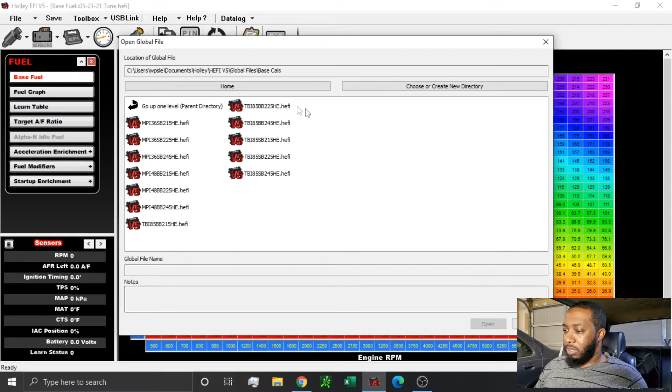Now, I did not build this base map. Holley provides some base fuel maps in the software already, which is actually pretty cool. As you can see here, open global file. If you go into here, they got base files. So this came with, and this is Holley V5, by the way, some base files, and you see for multi-port fuel injection, TBI. So you got some things in here that kind of get you going.

All right, so this is the base fuel map that it builds, and this kind of builds off of what you put in here, your target air fuel ratio. So you can go in there. This comes set up too, but I would change this. You know, do some research on the internet, because I didn't know anything about tuning or any of this stuff until I got it. So I'm kind of learning as I go. But get your air fuels where you want it.

Up here, it's going to be kind of like wide open throttle, and here it's going to be kind of like idling. And say you're wide open throttle and you just let off the throttle, you're up here around 5,500, 6,000. It's gonna come out here. You're gonna see a lot of vacuum here. It's gonna pull here and see what I gotta do, and just adding fuel. And we give a little crackle, a little pops, whatever, and it'll come back up as it comes back to idle right up around here. So what you put in here is how it's gonna adjust this, as far as the automatic learning thing is concerned. So that's your base fuel.

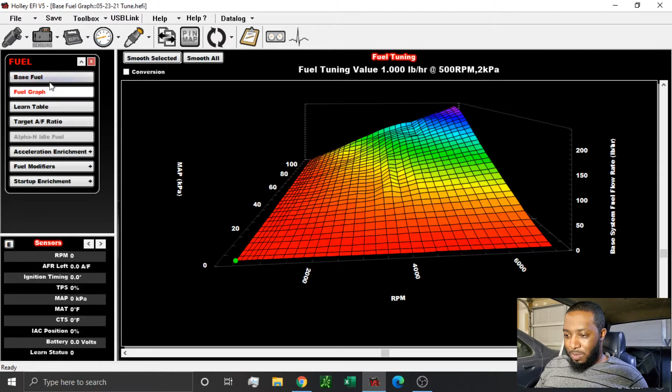And then you can go to learn fuel. Well, this is the base fuel graph, and now you're gonna go to learn fuel. So this is currently what is learned. And I just plugged this up to the laptop, so I'm seeing this just like you guys are seeing this right now. And this is showing you percent that is adding or subtracting to or from this base table, based on what you got in here, the target.

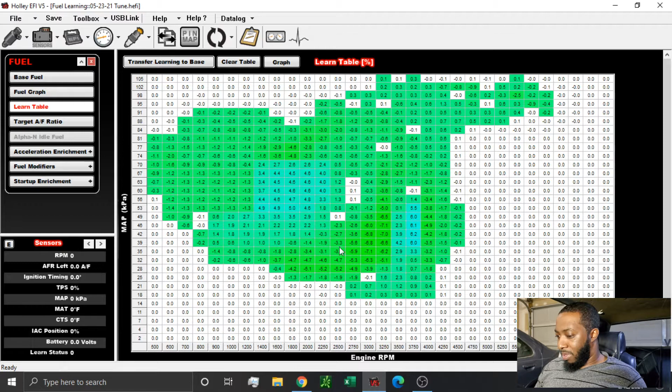Right, so you go back to your learn table, and you can see it's adding a chunk of fuel right here in this area. It's not too bad. It's only adding 4 more percent to what's here. And we're taking fuel out down here. And not seeing no big radical changes, that's good. And mind you, I had this on here for a while, so it basically learned a lot. So I got the learn turned down. So now I get into that next.

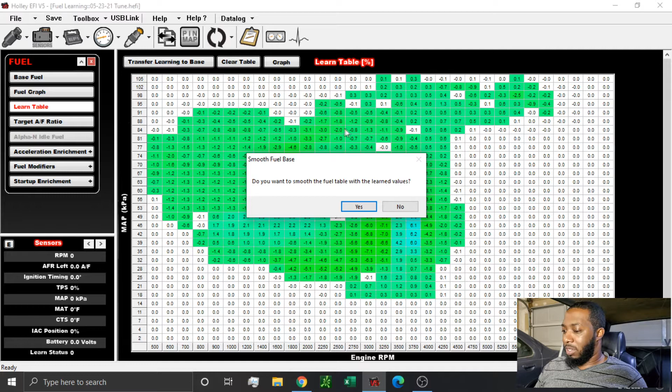So what you do here, for it to keep getting better and better, you want to transfer what is learned so far. And I do this every time I hook up the laptop to the car after a couple drives or whatever. I just hit transfer learn to base. And what you don't want to do, it says, do you want to smooth the fuel table with the learned values? No, you don't want to do that, because if you do that, it's going to change this part plus everything around it. What you want to change on this base table is only the cells that changed here. So you hit no. And see, now this is reset to 0 because it's ready to learn again.

So you go back to your base fuel table, and you see it only changes where these dots are. It didn't smooth anything around here, so nothing that it changed here affected anything that it didn't learn. So you do that. Yeah, let me save this while I'm here. Let's save this down. I like to save mine by the dates I did this on. So we'll put this like so.

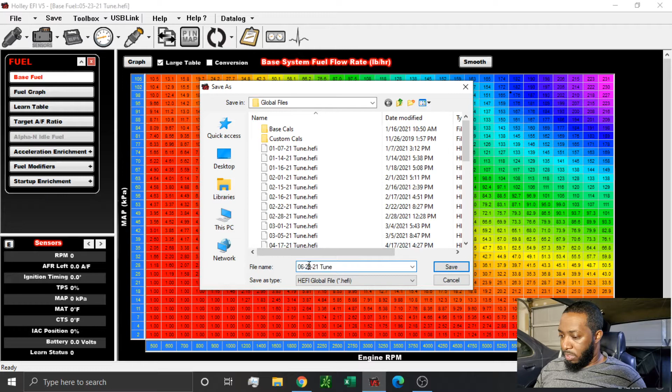And there you go. Now I'm kind of skipping around, since we're on fueling, to how this learn table is actually generated. So let me click around here and see where it's at. All right, we're gonna go over here to closed loop, learn loop, and then to learn parameters. Remember, this is how it learns. This is how fast or slow it learns your car.

When you get this thing from the factory, you just put it on from Holley, all these numbers are gonna be 100. So after a while of driving, let me go back here to the fuel table. In your learn table, your percents, I've noticed after a while mine wasn't going over 6-7%. So you don't need it to learn more than 100%. If you come here after driving for a while and it's only adjusted within a certain percentage, say within 20%, you can come here.

So since I was only seeing maybe a 7% max change, I changed the whole thing across the board to 8. So that limits how much it can learn. And this also comes to the closed loop. This is what it actually changes on the fly. The ECU actually changes the fuel table on the fly according to what you got in the set target air fuel map.

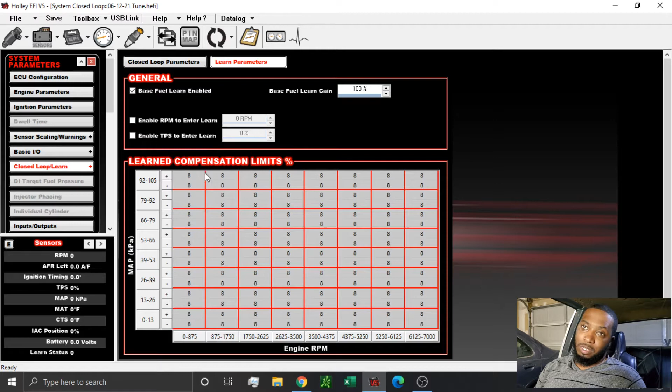Or vice versa, if it reads extra rich, it's going to lean it out and pull all the fuel out. I'm naturally aspirated, so maybe the worst thing that happens is the car cuts off. But if you're in some kind of boosted application, it could be catastrophic. So even if the O2 sensor went out or I was to unplug it and just run it, the computer will lock it down. It couldn't make more than the 8% change overall while I'm driving.

Okay, I know that was a lot, but while we're on fuel, we're gonna stick on some more fuel stuff. So we went over the base fuel, and this is just a graph of what's here. Like I said, I use one of the maps that Holley had. The fuel map is all right now. The timing map, that's a different thing, but we'll get to that. So the acceleration enrichment. Mind you, I wasn't a tuner, I didn't know anything about this till I bought it and started playing with it.

So this would be kind of like an accelerator pump on the carburetor. The faster you hit the gas, the faster it's gonna give the extra boost of fuel, because you need an extra burst of fuel with the extra burst of air. That burst of fuel is gonna carry the car until it lands back on the base map, because you need some enrichment if you stomp the throttle. So this is the rate of change: how fast you stomp the pedal is how fast it's gonna add fuel, pounds per hour.

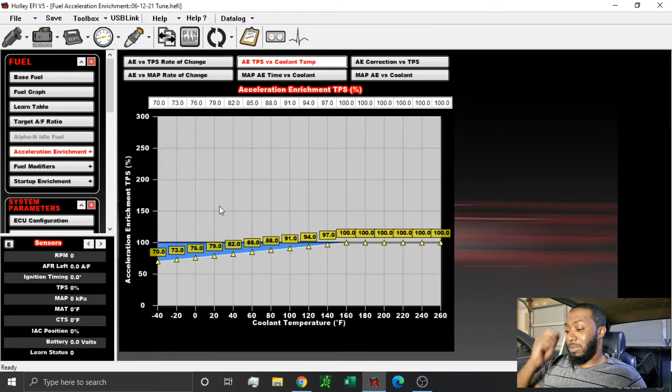Now this here, I'm not too in depth with this, but this is the TPS versus coolant temp. When the car is cold, down here, it needs more fuel to idle, but it doesn't need more fuel if you're whacking the throttle. If you already have more fuel at idle because the car is cold and you start whacking it, it's gonna get too rich. So right here, according to the temperature, I have it pulling fuel from this acceleration enrichment table.

According to the temperature, but you shouldn't be just whacking the throttle when your car is under, I'd say, 140 degrees, 120 degrees like that. But if you do, it's going to subtract these numbers from these numbers. And you learn all this in live views as the car's running. You can see what's going on and you can kind of put it where it needs to be, right?

And these two tables go hand in hand. This one here is AE versus TPS, and it's AE correction versus TPS. So I've seen online, I would say, there's two ways you can do this. You can turn this down a little bit for the acceleration enrichment. If you got to turn this down here, then you can turn this up here and kind of bring it down as you go. Or you can bring this down. These two working hand in hand. It's kind of confusing, but mind you, I'm just learning as I go with this.

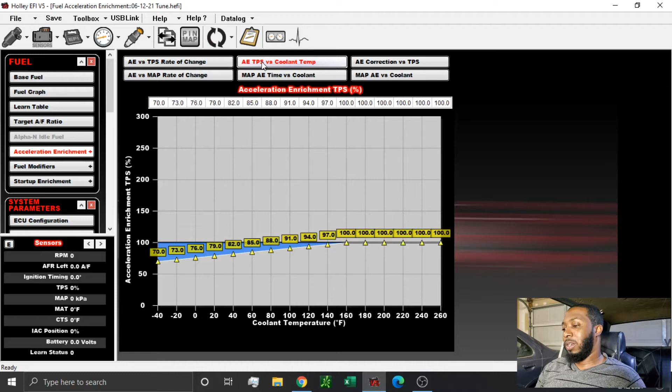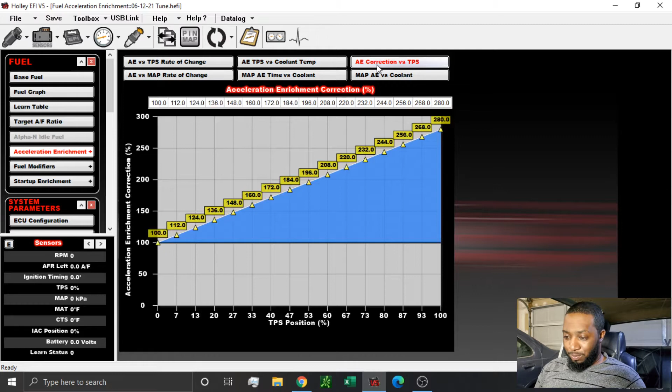But that's a whole other video in depth. Maybe I can go over it with the thing running and showing you all this stuff, but it'll be an hour-long video if I do that, so that'd be another one. So I'm just going over my understanding of the Holley software from just owning a Holley Terminator on an '83 G-Body. But the fueling takes a little bit to get dialed in, but once you get it dialed in, it'll run pretty good. So let's go over to another area, because I'm done talking about the fueling thing.

And this is basically sensors, MAP sensor, coolant temperature sensor, or sensor settings, but this is all basic, just sensors that came with the kit. So I didn't have to modify anything in this area. And this here is just basically what it is. Number of cylinders, how big the engine is, load sensing now. I see some people use speed density, VE base. Like I said, I didn't know anything about this until I got it. It was already set on speed density, so I left it there.

So this determines how this looks and how you adjust it. So right now, it's going by pounds per hour, how much fuel the motor is getting per hour. That's what mine is on, so I just left it there. And the O2 sensor, the type of fuel, and this is the clear flood TPS. So say if you are stomping the pedal while you're cranking it, it's not going to allow it to see any more than 35%. You're only on the throttle 35%.

No matter if you stomp it to the floor, you try to mash it to the floor and crank it, the ECU is only going to allow a 35% change according to the throttle. It's not going to allow 100 like a carburetor. If you just crank it and stomp it to the floor, it's giving it 100% of whatever's in the bowl or accelerator pump or whatever. EFI, you can manage that. So even if you got your foot to the floor, they kind of help you save yourself. It won't just dump a bunch of fuel while you're cranking. It just adds an extra, whatever 35% throttle is on your fuel map, if it makes any sense.

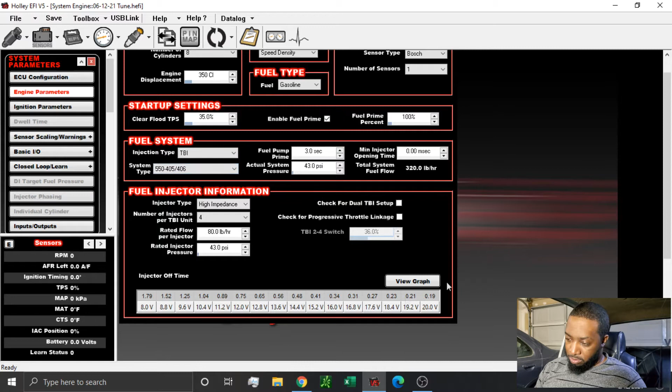This is just so before it cranks it shoots a little mist of fuel in there to kind of help you get going. Once the motor's hot, you don't really need it, but there's not really a setting to do it per temperature. But when it's cold, you kind of need it. And this is just fuel system, fuel pump. How long the fuel pump primes when you turn the key before you crank it. 3 seconds is good for me, and this is a whole bunch of injector stuff. And this is all preset when I got the kit. I didn't have to mess with any of that, and I didn't. So let's see what's over here. Okay, so this is your idle.

So didn't have to mess with that. This is basically the IAC, which keeps the car running when you take your foot off the throttle. Basically like a controlled air leak past the throttle blades. This is your idle spark.

So what this does is, if you have Holley controlling your timing, which I do, this will control the timing to help it idle. Just kind of getting into the spark map, which we'll get there, but I'll explain it while I'm here. I notice when the car is cold, this doesn't really kick in. It goes all off of what you have here in the spark table. Because the car is cold, it doesn't really need to do much with the spark if your spark

table is good. But when it's hot, say I have it set to idle at 15 degrees. When it's hot, the motor wants to go up past the set idle, say like 850. Because the motor's hot, it doesn't even need 15 degrees to idle, so it backs it down. So once it backs the timing down, this is what these numbers here are for, how fast it adjusts. So say if your idle shoots above the target, it drops the timing to bring your idle back down.

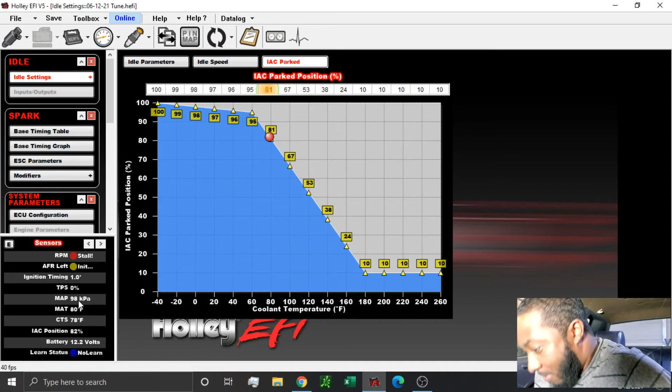TPS. See, if I go over here, you look at the TPS, and I mash it, you can see it. Well, see, there you go. And this is the manifold air temperature. Like I said, the car's cold. It's been sitting without running for about a week. This is the temperature of the coolant. Like I say here, the IAC position. So since it's about 80 degrees, it's holding it at about 81%. You see, as the car gets warmer, it drops down.

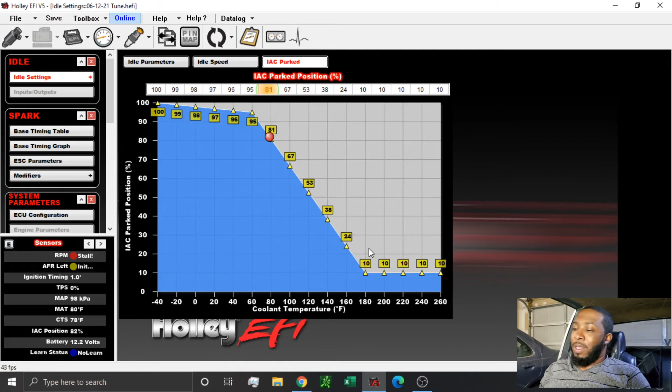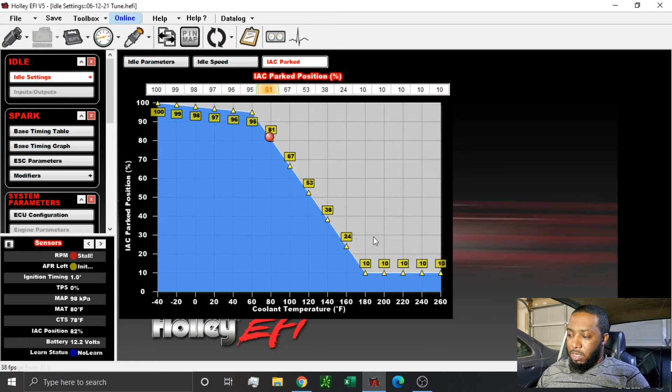When you shut the car off and it sits for a while, the temperature goes up. But it's not that the motor's getting hotter. It's just that the water pump is not spinning, so the water is just sitting in one spot and is making the temperature reading go up. So usually once I've been driving for a while, when I park it, it'll be around the 180, 200 area. So it doesn't need as much air when I'm cranking it when it's hot. As it cools off, it goes back up just to give it a little bit more air while it cranks. And that was all just playing with it over time. But that's basically the function of that.

Now what we got next here, okay, that's the idle stuff we went over. Now this is the timing table. And you see this lighting up. This is where we're sitting at now. We're sitting at 25 degrees of timing, which, like I said, it's not running. But when it's cranking, it's not going to actually crank at that. Let's see if I missed that setting. I don't know if I went over that with you guys. Okay, so I'm gonna have to go offline and disconnect from the car to show you this.

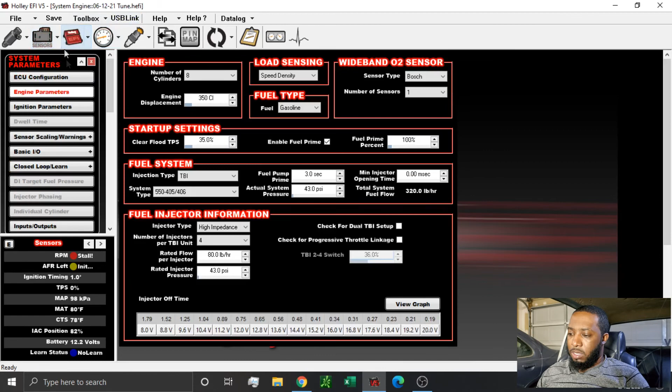Okay, ignition parameters. So this is where you set what kind of ignition you got in the car. So I have a GM HEI computer controlled distributor, and this is the rev limit at 6200, which I don't even need that much. It's a small block Chevy, but just in case it revved up and I didn't shift in time, it'll catch it and save the motor. So this is the cranking. I got it at 1 degree at cranking. The lower you put the timing at cranking, the easier it is on the starter. It won't be trying to buck back on the starter because it's trying to fire the spark plug before the motor reaches top dead center. It probably could take more than one, probably 5 or so, but I'll leave it there.

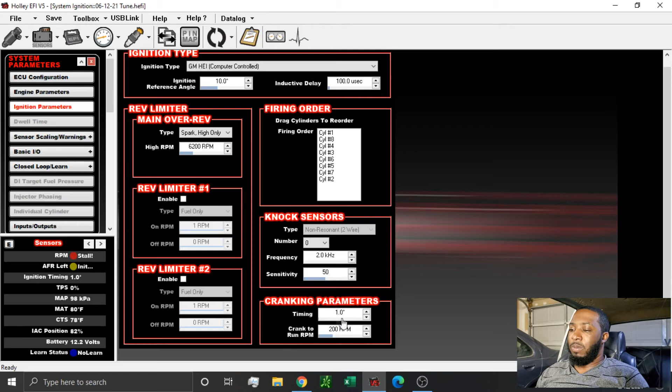And this is crank to run RPM. So anything under 200 is going to drop it down to 1 degree, and that would usually be around your cranking area. So when you come back here to your timing table and you see a 25 here, from 5 to 6, I got it at 25 degrees. And this is in case the motor starts to stumble. Sometimes when it's real cold, the motor will start, run up to about 1300 and stay for a while, but before the IAC kicks in good, it'll start to come down a little bit. And this is where it'll run into this 25 degrees and buck the motor back up, just like going and turning the distributor up. Once the idle's coming down, it'll knock it back in the zone.

So remember, my idle is set about 850, so I'm usually around in this area anyway. So if any situation happens where the motor starts to die before it falls, it'll try to throw timing at it to save it, and usually that works. Holley's all right with the fuel tables they give you if you pick the right one according to the size of your motor, and you can build from that. But they're terrible with the timing. You're gonna have to know timing and just play with it, depending on your motor and everything. So I give you a brief example of what I got going on. This is kind of the wide open area up here at the top. When you're in the throttle, wide open, this is it here.

And mind you, my timing table is probably real conservative. And this is where you're probably just cruising around. You're going to be idling up in this area. And this is by RPM, how fast you're going. This is your manifold pressure, vacuum, etc. The more vacuum, the lower you are down here. The less vacuum, the higher you are up here. This is when you're really on it.

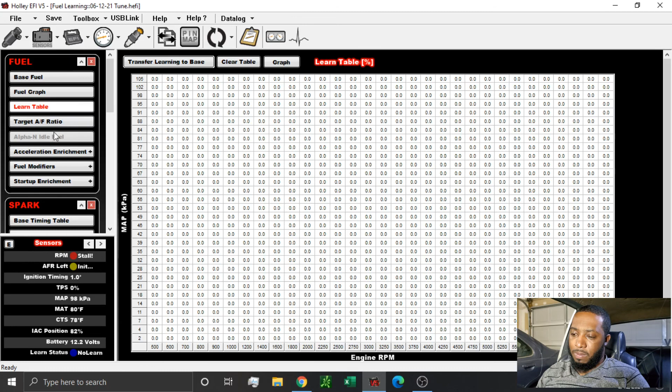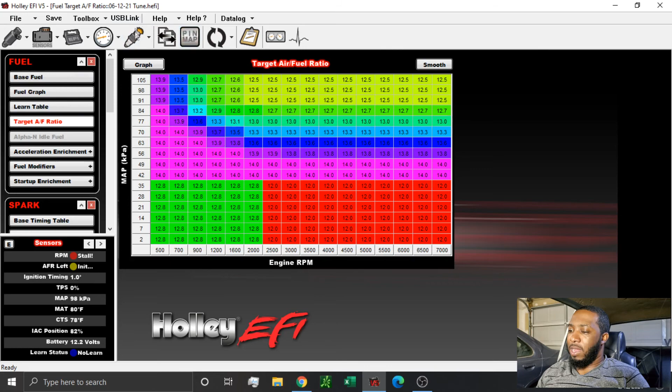And if you remember when I went back to the fuel map, this kind of matches here on my, not my learn table, my target air fuel table. Kind of got that set up the same way. So if I'm ever nailing this thing and let off the throttle, which I usually do after I'm nailing it, you're adding fuel when it's coming down. It's doing that number right there. So you got the fuel map matching this timing map doing the same thing. So it just sounds cool when you nail it and let off.

And I'm pretty sure with it dropping timing like that and adding fuel, it's probably just helping cool down the cylinder a little bit too. So you kind of got to know timing. I can't really give you a direction. It depends on your motor and how you want it with the timing. But I can at least tell you how to set it up. So once you put your distributor in, this car has a distributor on it. It's a small block Chevy, but an electronic distributor.

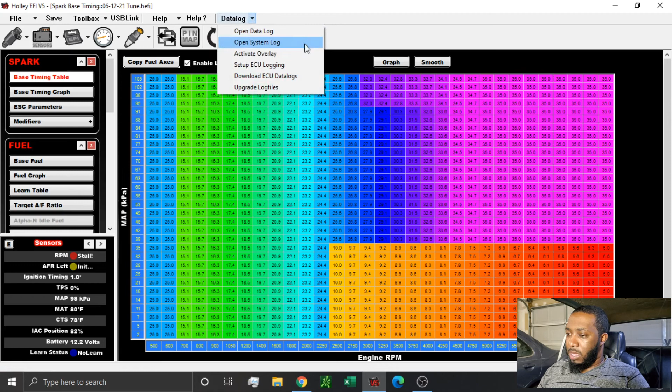So let me see if I can do this. I'm gonna have to link up with the car to be able to do this. Which I think I am gonna have to. Yes, I do. All right, so you got your distributor in. If you run the car with a distributor, you would put it in, and then you go here. It's real simple. You go here, then you go to enable static timing, and then you set this to whatever you want. So you set it at 8, and then you hit set.

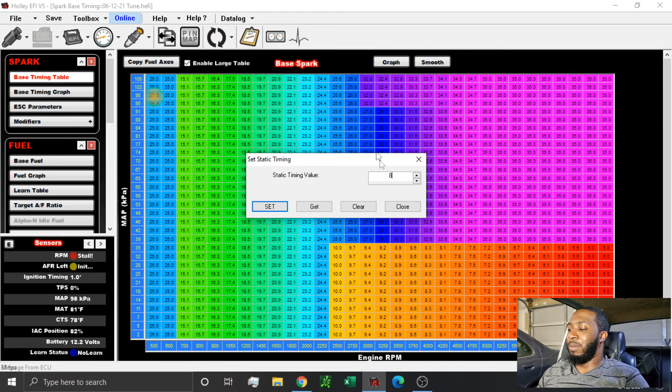Now the Holley is locked in at 8 degrees, so you take your time and you take your distributor and turn it until you hit 8 degrees on your timing tape, your balancer tab, whatever you got. That's pretty much it. Then you lock it down, so now it's locked in. If it says 8 on the motor and you set 8 here, everything should be lined up. And then when you close this out, the Holley's going to take control of everything. So if you put 15 here at 700 RPM, you should be at 15 degrees. Same thing all across the map. You understand what I'm saying? So that's how that goes.

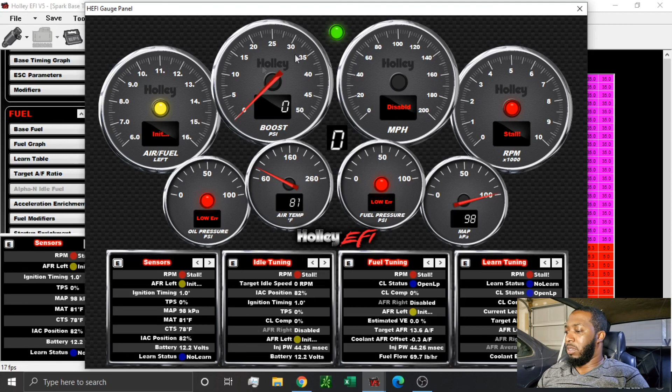And let me see if there's anything else, because mind you, I'm just giving a service on a lot of this because I'm really a novice on this. But I'll show you what I'm saying. Oh yeah, in this screen here, say it's running, you want to monitor everything that's going on. Let's back this up. Okay. See, now it's showing you everything, and injector pulse width. If you want to get that technical with it, you can. But you got all your information. When this thing runs, you see all this here moving. That'll be another video, because that'll come into data logs and everything.

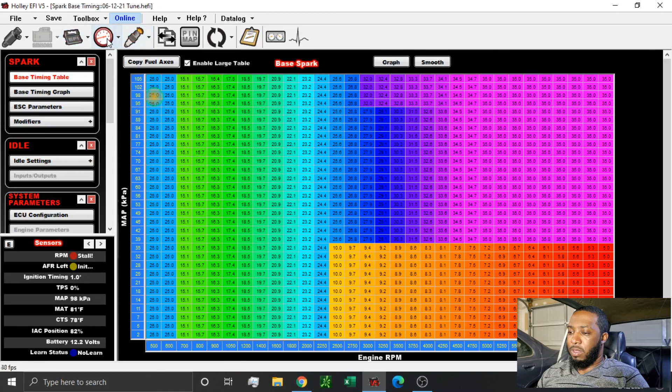So while I'm online, you'll see kind of where everything's sitting, because the car's not running. And then you can see where it's at with the timing. And then for your idle, it's real good. So if I cranked it up now, this is where it would idle, at 1075, because the car's about 80 degrees right now. You see we got 12.2 volts. So this is just a brief rundown, guys, and I know I kind of blew through this.